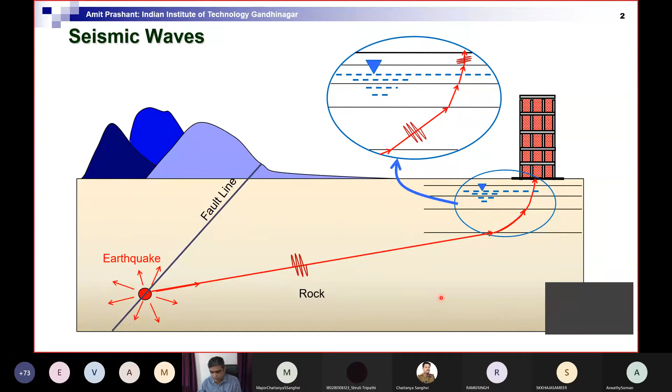We'll focus on design aspects mainly, but the overall picture will come only if you do all those components. That's what I wanted to point out. If I understand soils first, it is better for any design aspect. So what is the difficulty in designing foundations many times?

Besides the variability of strata and heterogeneity, which varies from point to point, it is difficult to know what soil is going to be where, unless you do very thorough geotechnical investigation. But of course, that comes with a limitation.

Then we have some small tests that we do, like index properties and other things in the investigation, and we get to know some parameters including strength parameters, the C value or phi value, based on which test you performed and which soil you encountered. That kind of decides which test you will be performing as well.

Most of the time within that we do very basic tests like UU test, UC test - unconfined compression test - or direct shear test. Very rarely will you see somebody doing consolidated undrained or consolidated drained test, unless it is a big structure or very big project.

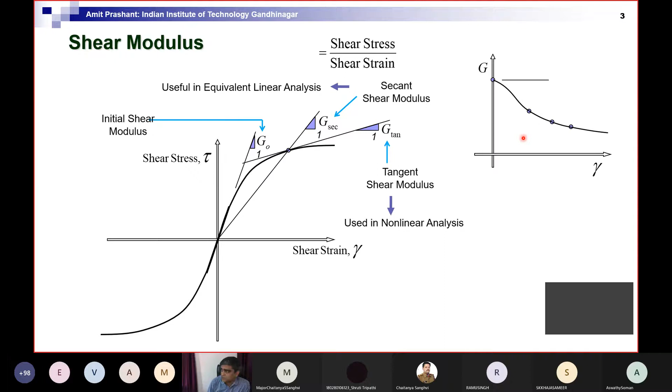Unless I perform some kind of resonant column test, or cyclic simple shear test, or cyclic triaxial test, or something like those. And that is going to be very rare that you will see this kind of testing being done. Now that is where the challenge is. So the challenge is not really in the concepts, the challenge is in estimation of parameters, and that too representing the whole soil strata, at least for the representative depth, you can say, right? So that is one thing.

Now, most of the times when we talk about dynamic analysis, or earthquake response or dynamic response, in whatever sense, we talk about anything which has cyclic loading. Now, what does that cyclic loading relate to the curve that we saw on the last slide? So if I perform cyclic loading at different strain levels, what I see is that the slope is changing - slope means joining the peak to peak values, right? So if you see this red to blue to dark blue, the slope is decreasing. But at the same time, the curve is becoming fatter - the cycle is becoming fatter.

And fatter means more energy is getting dissipated in completing the cycle. So that means more damping in a way. So with more and more strain, what I observe is that modulus is reducing, but damping is increasing - the material damping, right? Whereas G naught was same, the secant modulus is changing.

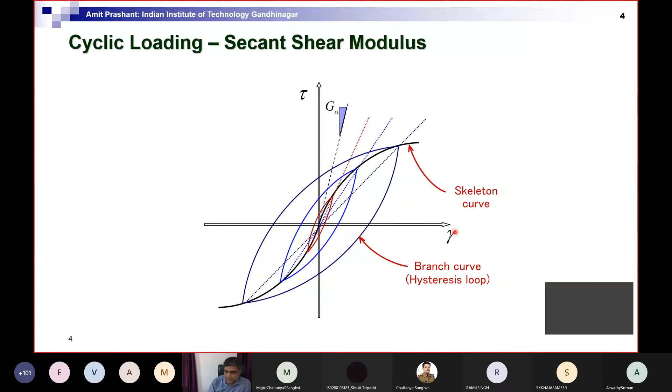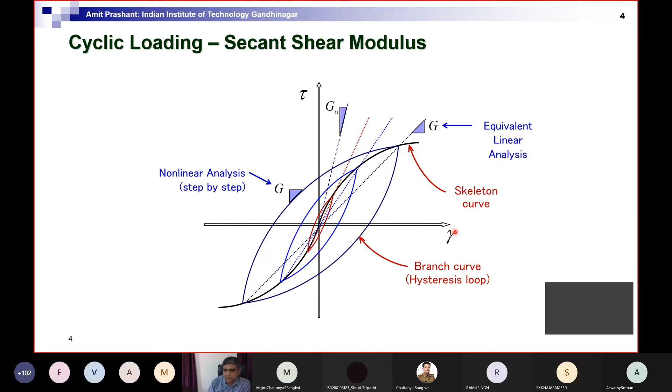If I compare with static response or backbone curve kind of thing, skeleton curve, right - that you see as a black curve here as well. So with this basic understanding that I have now, I can use the slope of the curve for nonlinear analysis, and the direct peak to peak value, slope value, that will be a secant modulus type thing, and that will be used for equivalent linear analysis kind of thing.

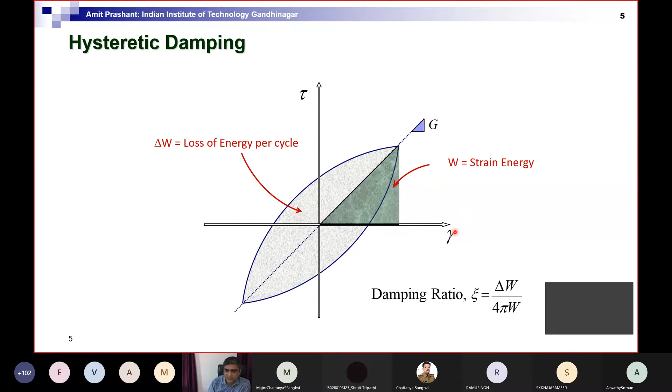And for damping ratio, I can find from this curve itself if I have it, but again, rarely will you see that any of these kind of tests are performed, right? So that is where we have to depend a lot on empiricism many times because we don't have data. It's very expensive and not many people can conduct these kind of tests. It's not that it cannot be done - it can be done, but it's just that it has not come to practice at a general level, you can say, because it's complicated to do those tests many times, right? And so some ballpark idea about what those values are can be obtained from some empirical or recommended tables.

Now this Gmax, there is another way I can find out - I don't need to necessarily perform laboratory tests. So the other method that is available to me is field tests. In the field, I can perform geophysical methods, which is like you may have heard of reflection survey, refraction survey, where we place geophones at certain intervals, and we take a hammer and put it on the ground, and that generates some mechanical waves. It travels through the ground, and then we measure at the geophones, and that I use for estimating how much time it took for the wave to travel.

And from that wave velocity, I can estimate the modulus. Of course, these waves are at very, very small strains, so this represents the G naught or G max value in a way. So that is one way, and there can be several methods like cross hole method, uphole method, downhole method, SASW, MASW.

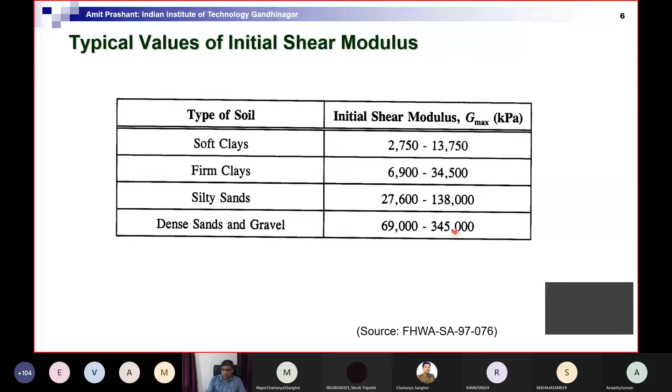So let's look at how these modulus values, G naught or G max, can change with different aspects. With overburden or effective stress, it increases. So with depth, it is supposed to increase even if you don't change the density, although density will change because of the overburden, but effective stress itself may have influence. Similarly, if void ratio is decreasing, G naught will be higher; void ratio higher means density is lower, so G naught will be lower. There are several other aspects that influence that G naught value.

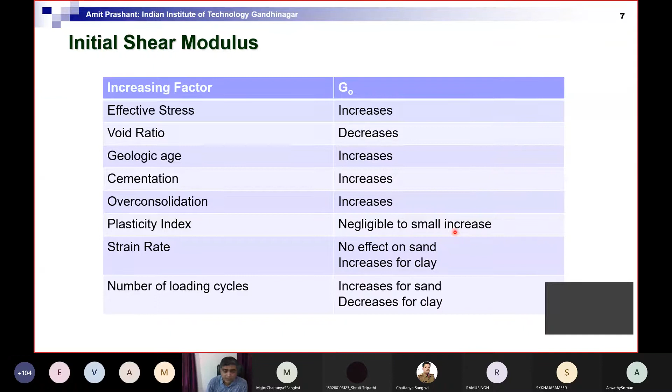So it's very difficult to say a table is good enough to represent that value in a way. That is one difficulty that we face.

Now another aspect to Gmax estimation: if I want a more precise estimate than a wide range of table values, I can correlate those with SPT or CPT values. SPT is standard penetration test, CPT is cone penetration test. And I can correlate that if I know void ratio, I may be more precise. If I know if it is over consolidated, I may be more precise. So the more information I know, maybe I will be more precise in my estimate. But there are more than 50, 60 recommendations of Gmax based on different combinations of SPT and CPT values.

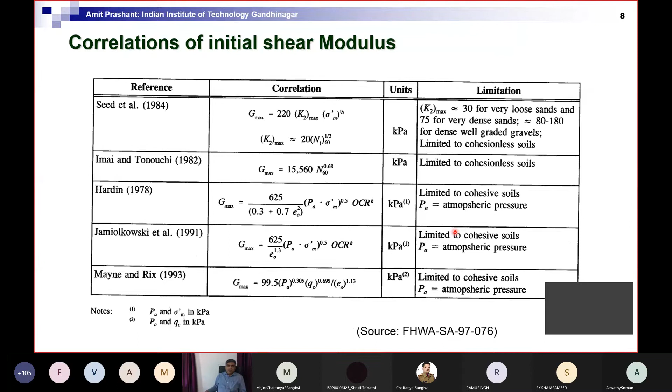Now if I take one geotechnical investigation for a site and perform this analysis, this is done for Ahmedabad only. This data is from Koba Circle, near DPS Gandhinagar. For that soil strata, we had plotted several recommendations about 10 years back, and looked at how it varies with depth based on these recommendations. What I see here is a variation of almost 7 times. It varies from almost 50 to 550, 60 to 550 or something like that at the bottom.

So how good is this? That is another challenge. All these correlations are good, but why is this varying so much? Because these correlations have been developed for limited data based on whatever different research groups found for certain sites. That representative site would be 2 or 3, 4 locations, that's it, and that soil may be very different.

For instance, you have more alluvial deposits in India, whereas if you take Japanese data, you will have more volcanic type deposits. And if you go to UK or US, you may have more glacial deposits or residual soils kind of things. They have very different nature in terms of their characteristics and how they respond to SPT versus how they have shear wave velocity.

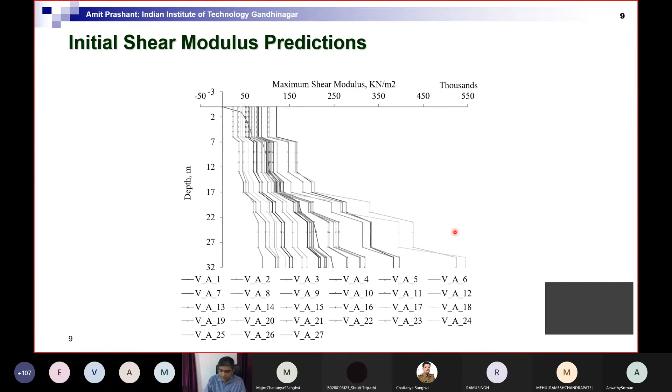Don't just depend on these empirical correlations, but perform geophysical methods. At least you may have 20-30% error, but not the 300-400% error possibility. There is a lot of hesitation and resistance to perform geophysical methods because people believe that won't give authentic results. That may have been true some time back, but today a knowledgeable person would know which method works for which strata, since not every method works for every strata. That's where misinterpretation happens, but in any case, it is better to perform these methods.

Now, if I know that, I still need a modulus reduction curve. So I need to perform for that particular soil some kind of resonant column test or dynamic simple shear test or something like that, and that is again very difficult. Well, at least I know G naught, so I will be able to find G if I can have some fair estimate of what kind of modulus reduction curve I can use.

So one representative modulus reduction curve range that I have produced here, for 3 different categories - gravel, sand, and clay - the variation can be maybe 1.5 to 2 times. I'm purposefully giving you these as large variations because people believe that like the strength of steel may have 5% or 10% variation, soil estimates may have 20-30% variation, but if you talk about these G values, G naught values, it can have much more variation. So that's where the challenge is in a way.

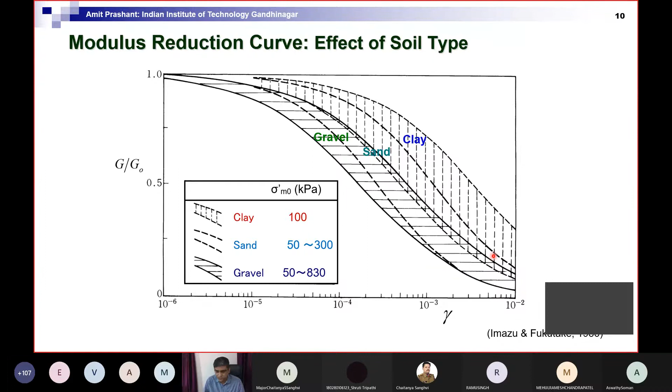Now, this kind of plot I may still use instead of going for a comprehensive geotechnical investigation, because that will become a project itself, and it's not worth spending so much time on that kind of investigation. I may take conservative decisions based on whatever I observe from the estimated G naught value or G value that I will use for analysis.

So I hope you got some glimpse of what soil properties mean in terms of modulus, in terms of damping, in terms of modulus reduction, and so on - some sense of that. For different types of loading, earthquake loading ranges from almost very small strain to very large strain, going almost like 1% strain or maybe even more. So depending on the soil strata, the deformations can vary a lot.

And that's where the G versus G naught relationship becomes very important for earthquake analysis. That is not so much the case for machine foundations, because we know deformations will be very small in a particular range. But here, we have no choice but to worry about the modulus reduction.

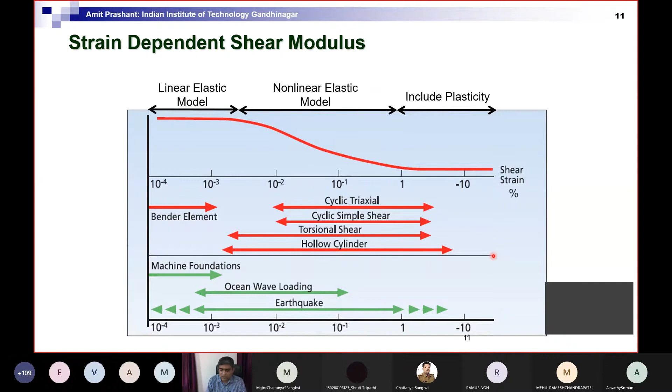Just to show how G versus damping variation happens - if you look at the strain level, the slope was reducing for the secant modulus, so G by G naught is reducing, that's the blue curve. And if you look at the cycle, it is becoming fatter and fatter, meaning more energy dissipation, more damping. So damping is increasing in general with gamma.

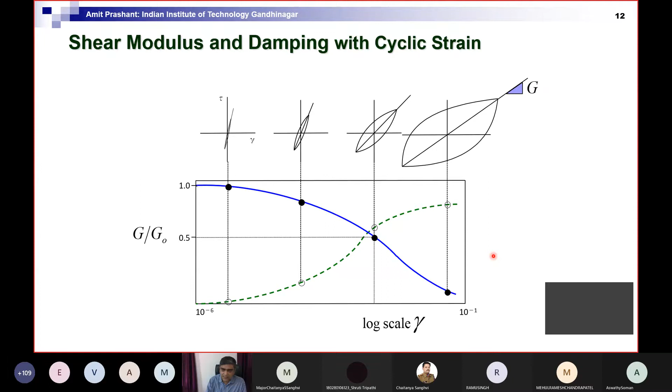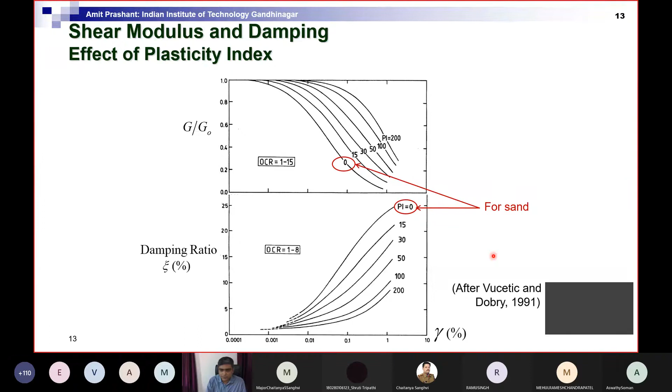This is true for most soils, but not 100% of soils. Some soils show a weird response due to other aspects coming into picture, like structural changes or pore pressure changes. These can influence the curves a little, but that is not a very common variation. In general, you will observe that modulus is reducing with strain level and damping is increasing with strain level. This is just one example for a soil, showing how damping ratio and G by G naught vary with strain level - if strain is higher, the damping ratio will be increasing.

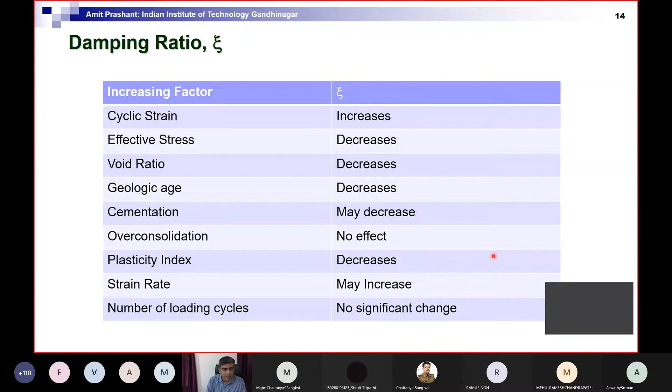If effective stress is higher, damping may decrease rather. With void ratio increasing, meaning density is lower, the damping is lower. Similarly, there are many other aspects which can influence damping ratio. Now, this is one aspect.

Another issue we deal with is volume change in soils. Soils can be contractive or dilative depending on their packing. If the soil is more dense type, it may be dilative. If it is loose to medium dense, it may be contractive. And if you have water present, that contractive response will lead to positive pore pressure, and that means reduction in effective stress.

And what we said is, if effective stress is low, G reduces. So we had one problem, and now on top of that, another problem: we have earthquake loading, which is fast loading. If water is present, that may increase pore pressure if it is loose to medium dense kind of soil, and that may reduce effective stress. If it reduces effective stress, then G will further reduce. So whatever you measured, whatever you estimated as G, that may not be sufficient. It may be much lower than that if you have pore pressure building up there.

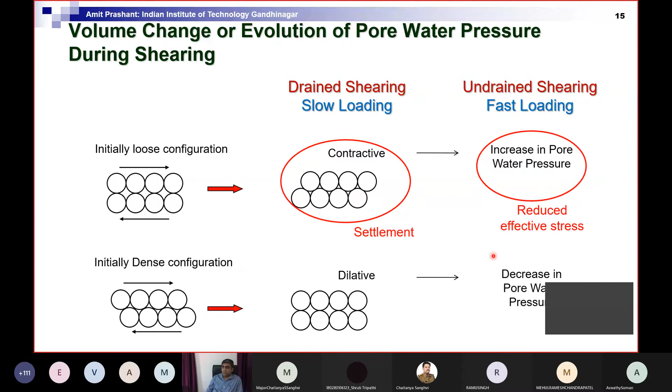In the dilative case, it is just the reverse response. Pore pressure reduces, the effective stress increases, so it becomes stiffer and stiffer with pore pressure building in the negative direction. So that way, that's not a big concern, I would say. But this contractive nature, in extreme cases, becomes liquefaction that you may have heard of, with very high pore pressure buildup.

Now, all these things are going to influence whatever structure you place on the ground, whether you like it or not, it doesn't care. So if you have dry soil, if you have drained loading, or if loading is very slow, pore pressure is not a concern, but you may still have vibrations on the foundations you place, and that may excite different modes of vibration possible under seismic loading. They may have continued settlement in each cycle, but that settlement will be reducing, and this settlement will be more than the static settlement you would expect under static loading. Static loading is just one cycle, in a way—not even one cycle, even half cycle, I would say.

Now, when you have undrained condition, if it is compressive or contractive in nature, you will have pore pressure buildup, and that pore pressure buildup may decrease the effective confinement. If the total confinement equals pore pressure, it will reach zero confinement in effective sense. So effective confinement becomes zero, and if that happens, the strength, the stiffness, everything goes to zero. So most non-cohesive type soils have this problem: if pore pressure is high, effective stress becomes very low, and they may lose strength completely—we call it liquefaction.

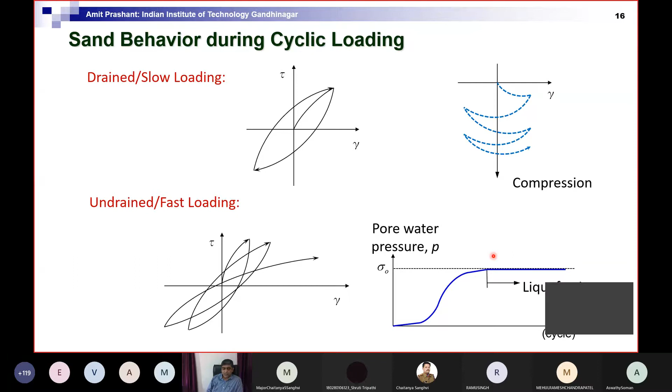There are certain soils which are highly susceptible, and there are certain soils with even lower density that may not liquefy under the same conditions. That depends on particle shape, size, the nature of interlocking and so on - there are several aspects to it. Then one important thing to remember is you need water for liquefaction to happen, for initial liquefaction to happen. So if there is no water, there is no pore pressure. That we have to keep in mind as well. So there are certain aspects to this which we need to worry about.

But is that the only story? No. So I was mentioning there is another aspect to liquefaction. The word liquefaction that you use is actually initial liquefaction, and it is one kind of instability in the soil called pore solid fluid instability, or fluid instability simply. Now there are other possibilities of instabilities that can happen.

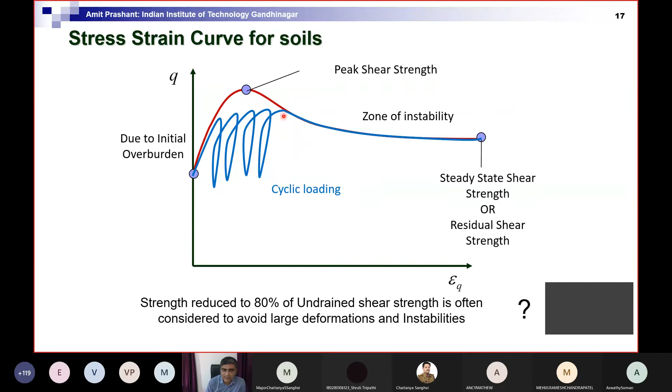Now this can be classified as instability again. This is another kind of issue that can happen many times - strength is not going to zero, but strength is much lower than what I had taken for design. So if the strength taken for design is higher than the actual strength of the soil, then what will happen?

You will have failure, right? And that's where in codes you will see that we use reduced strength many times - sometimes called residual strength also. That covers instabilities of this kind, you can say. So even from isotropic condition, under undrained condition, you will have this kind of response, and liquefaction is defined when it reaches here. But what I said is failure can happen way before that - it doesn't need to necessarily reach the liquefaction condition.

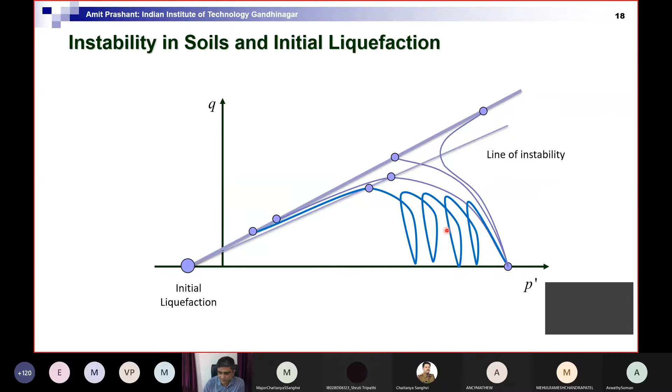Okay, so moving on to some structures. If I look at shallow foundations, they can have various modes of failure possibility. They can shake around vertically or horizontally, ratcheting can happen, they can shake about an axis in some sense. Also the regular failures you had earlier - excessive settlement or bearing capacity failures - those are also possible because of huge loads coming in.

All these possibilities exist because there is a wave traveling from the ground, interacting with the foundation, and the foundation supports a structure above that will have its own response. When we talk about dynamic response, it is always the frequency of loading and the natural frequency of the structure that have a role to play. If they match, you have much more amplification; if they don't match, you may not have so much amplification. So that aspect is also there on top of this.

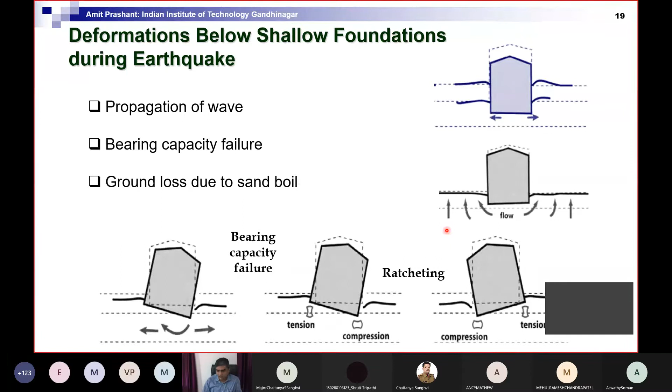So in a way, what you want to make sure is that whatever happens, your foundation is still there. And from that point of view, some guidelines have come up with time.

So due to cyclic degradation - the strength degradation I was talking about, stiffness reducing with strain - also another degradation is possible, referred to here, where with every cycle there is a reduction in stiffness. So the bearing capacity that was available for load is not available anymore. Both strength and stiffness have reduced with every cycle of loading.

There can be stability issues of the foundation - sliding or overturning - because of large horizontal inertial forces. And around the foundation, you may have large settlement due to tilting of the foundation, or due to moments coming from the building as well, so there is eccentric loading that will develop below the foundation.

Softening or failure of the ground due to redistribution of pore pressure is also possible. Remember that pore pressure develops according to the shear deformation that happens at different locations. So if shear deformation is uniform throughout, pore pressure buildup will be uniform; if it is not uniform, then it will be different at different locations. That is another complication that comes into picture in many ways.

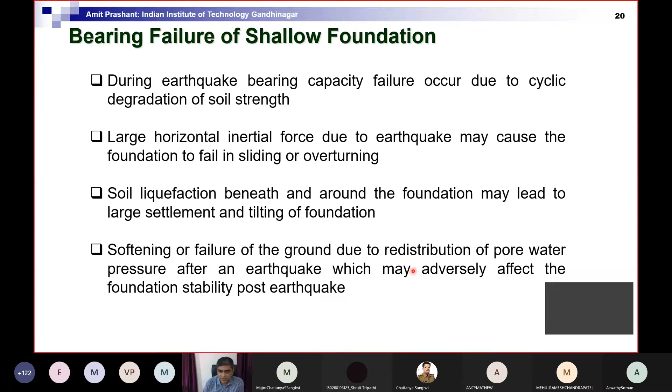Of course, we cannot handle all of this to 100% accuracy in simple analysis. It would become a very complicated transient finite element analysis with time domain analysis for seismic loading - that would become like a research project, and no project has that kind of time to perform the analysis. That's where codal provisions have to take care of it in some way.

For IS 1893:2016, we had one update from, I think, 2002 and 2010, and there were several updates before that. Even after 2016, there was a lot of complication and confusion within it. So last year we had a big exercise of revising 1893. Professor Sudhir Jain was involved as a World Bank initiative, taking lead, and we all chipped in for contribution into the revision of the code. It is under consideration for BIS to adopt it or not, but most of the recommendations I'm showing here are well established, so nothing to worry about as such.

So what I'm presenting here may not be the fully approved code. It may be approved after some time, and I'm not sure if there'll be significant variation from this, but there can be - so that is the disclaimer I want to give.

So what we define here are three types of soils, so that we can have at least some idea about what analysis we are going to do: Type A, Type B, Type C, classified based on SPT values, CPT values, or shear wave velocity, whichever is available to you.

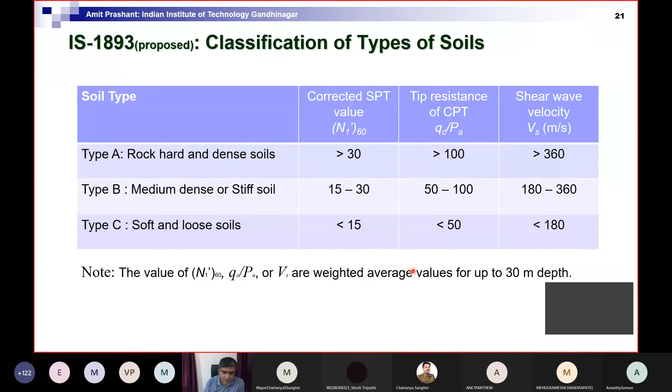And that we take as an average for top 30 meters of strata from the ground surface up to 30 meter depth. That average, weighted average value, we consider, and accordingly we classify as type A, type B, type C. Based on the types of soils, you decide many other things in the code, including which response spectrum to use for the building itself. You may have seen a similar kind of slide earlier in some other presentation as well.

From the foundation's point of view, let's make it very simple. Earthquakes are short-term, transient loading. We design structures for the maximum earthquake expected for a certain design period, some return period. So the probability of that earthquake occurring during the design life is very small, and the duration is very small. Third, if it happens, maybe we can allow some deformation to occur. Some damage, if it happens, is okay. It should not be life-threatening.

So considering all these aspects, I can allow the structure a lower factor of safety, or since it is for a short period, I can have a larger allowable bearing pressure. Remember, if it is transient loading, acceleration is happening for a fraction of a second, maybe 0.1 or 0.2 seconds. When I convert acceleration to displacement, it gets integrated, and that displacement comes out as some finite value, but that force occurs only for a short period. So what we are designing here most of the time is for force, not for deformation. If we allow that deformation to happen, then the allowable force can be increased. That is the logic behind this increase in bearing pressure assumed for seismic loading considerations. So IS 1893 allows for this increase depending on the soil type.

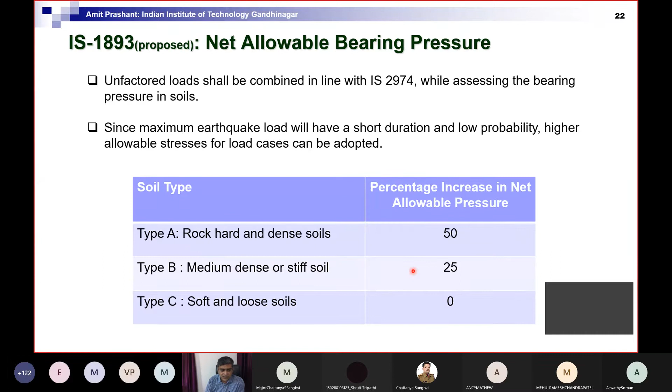Now, liquefaction susceptibility is another aspect, and here we are talking about initial liquefaction mainly. There is an appendix in the code that gives a simplified method of determining whether it is going to liquefy or not. What we are defining here are a few guidelines on what you should worry about and how to decide whether to perform the liquefaction analysis.

So if the soil deposit consists of loose to medium type cohesionless soils, sandy and silty sand, low silt type sands, then I should worry about it if it is going to be underwater. If it is not going to be underwater during the design life, I'm not supposed to worry about it.

Now, the code will also mention that if you have marine clays, you have to worry about it again. Marine clays are sensitive, so if you shake them, they lose strength suddenly, similar to what happens in liquefaction in general. So if you go to locations near Kandla port, sorry, Adani port, or south of Dholera and those regions, you may find some of these kinds of deposits. When rain happens, they become very soft, and similarly, if they are saturated and shaking happens, they may further lose strength and simply become like a swamp. So what kind of strength can I expect there? Almost nothing. So those are also included in the new proposal.

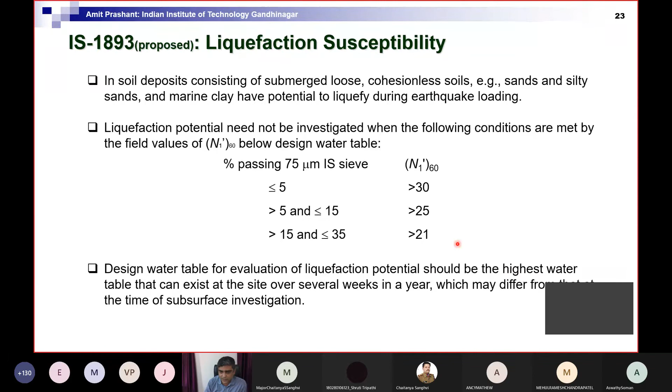Other than that, I can have mitigation techniques - some kind of ground improvement by compaction, dynamic compaction, or vibro compaction; all those possibilities are there. What we need to make sure is that the SPT critical values shown earlier are exceeded, so it's confirmed the soil will not liquefy anymore. Or alternatively, I can provide a water path for water to drain out quickly so pore pressure doesn't build up, done using sand columns, stone columns, or PVDs. That way water comes out as quickly as possible with no pore pressure generation to cause liquefaction. So one way or the other, I have to provide remediation.

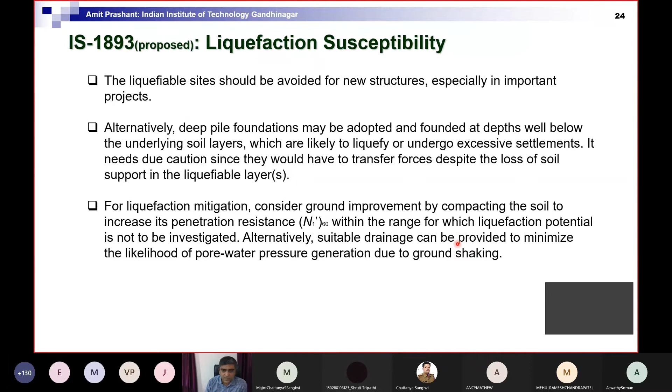Marine clays, layers, and other sensitive clays may also liquefy and undergo excessive settlements. That comes as a surprise many times because shear strength failures are mostly very sudden failures. Just before failure, everything will look fine, and then suddenly it will collapse.

Ground improvement techniques can be compaction or vertical drains, as I was mentioning. Feasibility of compaction will depend on soil type, so different soil types may need different compaction methods to be implemented.

If you provide vertical drains like stone columns or PVDs, you would expect that when seismic loading happens, there will be pore pressure buildup, and that pore pressure will dissipate. Water will go out from the vertical drains, so something is coming out of the ground. In that case, there will be some settlement, and that settlement we should account for in the overall design.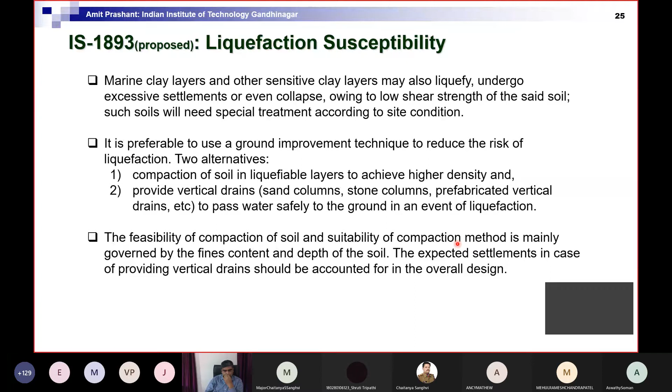Now, another aspect for shallow foundations. When you have seismic loading with a building at the top, you have inertia forces developing in the building, and those inertia forces are going to transfer at the base as shear forces or moments.

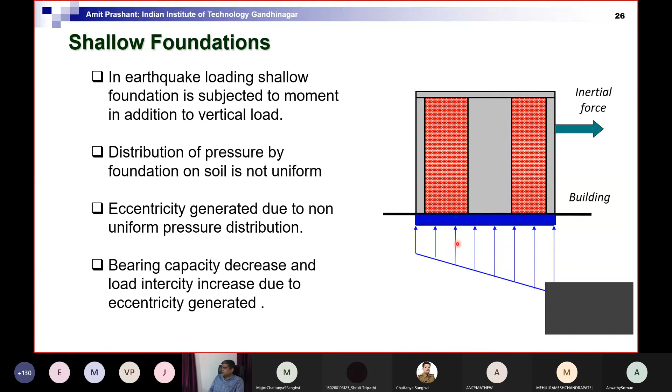One thing we generally make sure of is that the eccentricity stays within the middle one third, which we learned in undergrad itself — that in any gravity type structure or foundation, you try to remain within the middle one third. And we can estimate the bearing capacity, etc., for an effective width.

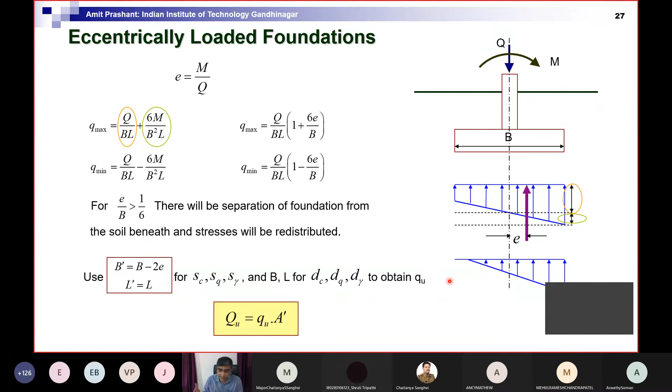For that case, different codes generally allow a certain amount of uplift. The width of uplift versus the total width — that ratio can go up to one third, or sometimes even one half, depending on which code you are referring to. That is for dynamic analysis, not for pseudo-static analysis or static loading.

Okay, now that is for bearing capacity. If I want to find settlement, maybe I can use similarly effective area, and that means load is same, but foundation size that I will be considering will be smaller, so the intensity will be larger. So settlement that comes out after calculation will be larger, right? That is for settlement calculation as an average.

But if I want to find differential settlements, or find out how is the distribution in larger foundations and so on, then I may need some kind of soil structure analysis kind of thing, and that is where some springs are provided many times. In most projects, we don't do this kind of analysis, except in large projects maybe, where you need to find out how much is the settlement, how much is the tilt, and so on. That's where, in a way, you want to find out how the dynamic response is going to be, if you are performing dynamic analysis.

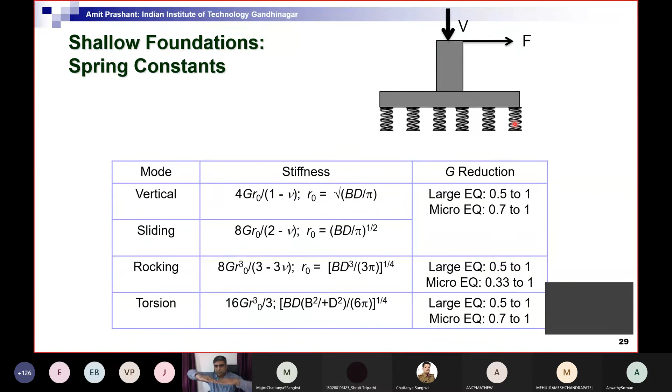So under those conditions, you can estimate G values for finding the stiffnesses. You can find the stiffness based on the G values of the soil, and springs are defined based on what mode of vibration you are looking at. So there are various possibilities for the foundation, and those various modes will have different stiffnesses. For example, vertical vibration will have a vertical spring, right? If you have sliding resistance, then your spring will come horizontally, not vertically, against sliding. For rocking, you may have the same thing, but the motion is different, and so on.

Now, for liquefiable layers, what care do I need if I'm providing pile foundations?

Now, there are two aspects to when liquefaction happens. One is I have loss of strength. Second is that besides that loss of strength, the whole ground is moving slowly after the earthquake because of liquefaction.

Due to some sloping ground, or maybe internal layers are in slopes, it may appear at the top that it is all flat ground, but the second layer is actually sloping. That can happen near rivers, near water bodies. Any formation will have slope, only then water was confined to that area. So after that, if you filled up the river or pond, you still have that slope below, buried into the ground. So that slope of the original ground is still sloping in a way, and if it is saturated, you have trouble in a way. So those kind of situations can cause movement of the ground in lateral direction, and that is called lateral spreading of the ground.

So the codal provision is that a site with an average sloping ground, which is steeper than 5 degrees, a 5 degree slope, there we have to worry about this lateral spreading in general. This is just additional information, but I will talk about this lateral spreading more on the next slide.

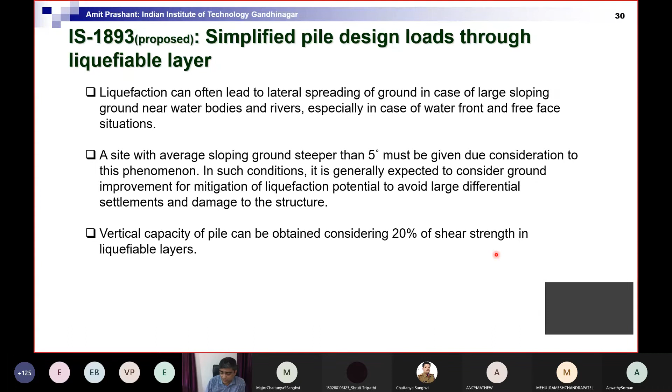Okay, so this is coming actually from Japanese codes, and now we are adopting it in the IS 1893 proposed one. It was not there in the earlier one. So this hopefully will get through.

The liquefiable layer has smaller strength, so maybe I don't need to worry about it too much, although there will be some pressure coming from there. But imagine how much force this can apply, and that will be in passive mode.

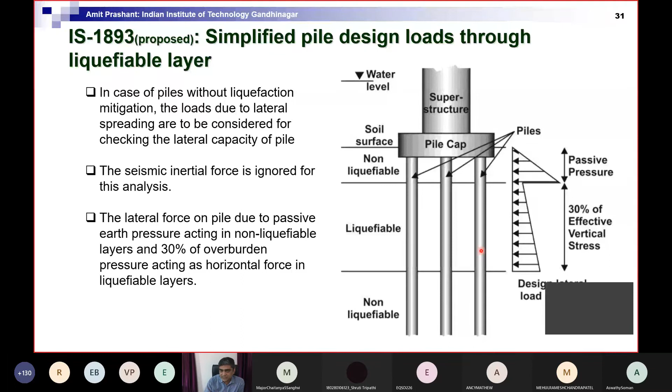So we have to look at both many times. Sometimes ground improvement may not be possible, or you may not have time for that, meaning there is urgency of implementation. In such situations, you may have to go for pile. Sometimes time is more important than money in a way, so in that case I'll go for pile for sure. I have to assess between all these aspects and then decide which way to go.

There are some general guidelines given, and we need to tie the foundations if we are providing isolated footings. Also in zone 4 and zone 5, which are high seismic zones, individual spread footings or pile caps should be interconnected with ties.

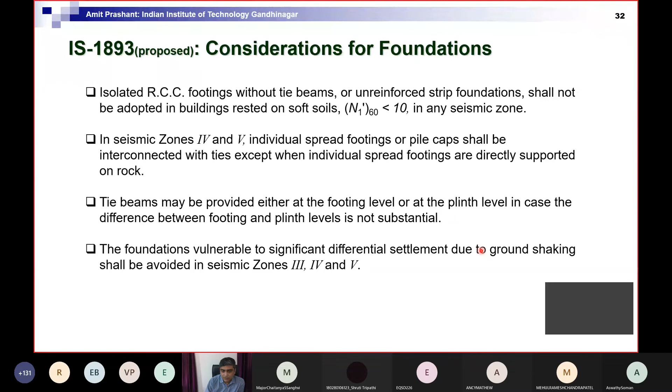A tie beam can be provided either at the footing level or at plinth level. And if the foundation is vulnerable to significant differential settlement due to ground shaking, we should avoid them in zone 3, 4, or 5 and make the foundation design more uniform settlement type.

Just to give you a sense of simplified analysis for this purpose, we can take beam column elements for the pile and then provide horizontal and vertical springs. Those springs can have stiffnesses corresponding to guidelines given in pile codes with respect to subgrade modulus, or we can refer to other codes if referring to that, and loading will be provided accordingly.

Up to whatever depth you are providing, along with this spring you will have some loading acting. And of course, in liquefiable layers, the horizontal springs may simply be removed because there is no lateral resistance almost. Even at the top, there may not be resistance available because the top may be moving with the liquefiable layers. So the springs will be available only for the ground below the maximum depth of liquefaction.

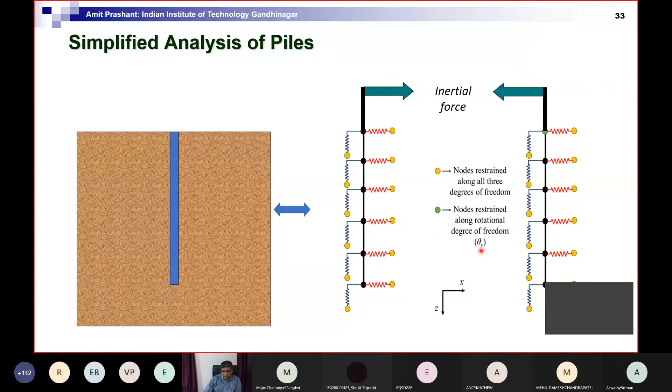These are two plots shown just to show the difference between pile without pile cap and with pile cap. The boundary conditions are a little different.

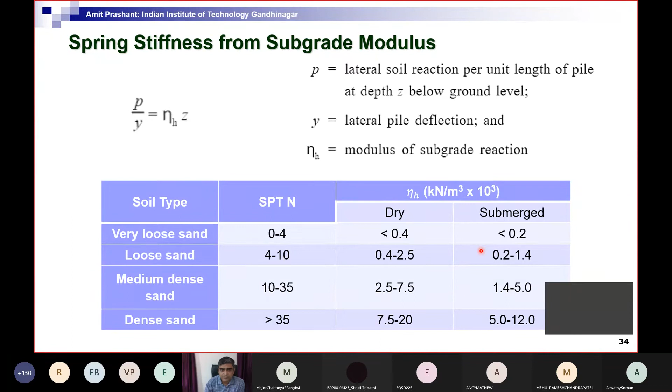So the codal provisions I was referring to for subgrade modulus, I have copy pasted here, that is IS 2911 part 1 or part 4. I think I forgot to mention the pile code here, but that is for a concrete pile. There is an IS code that gives you this, and similarly for clay soils, it is a different criteria.

For a group of piles, we have another challenge where multiple piles are placed nearby and deformation can happen in one direction or the other. So for critical cases, we may consider either along the X direction or Y direction of the building, most of the time. Then I have to provide spring constants also in both directions, following the same guidelines we saw earlier.

But there is a P multiplier, which is a stiffness reduction that has to be provided because the pile in front may have resistance different from the pile inside. So piles outside may have different resistance than piles inside, having some kind of shadow effects and so on. That effect has to be accounted for when you have nearby piles, and there are some recommendations for that.

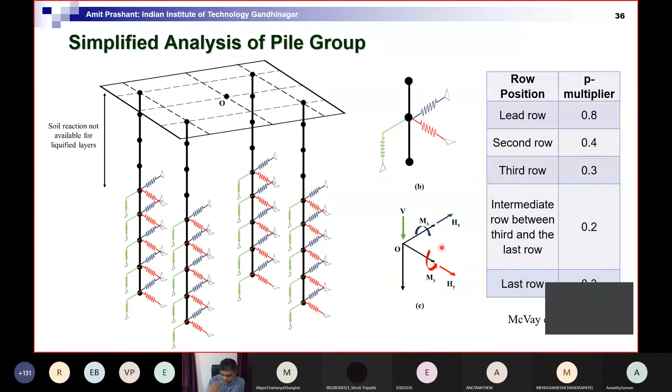So we are working on a code for Indian Roads Congress right now, where we will describe all these aspects further, and hopefully it will come out in the next 4 or 5 months, 6 months kind of thing. So these P multipliers are used to have the spring reduced.

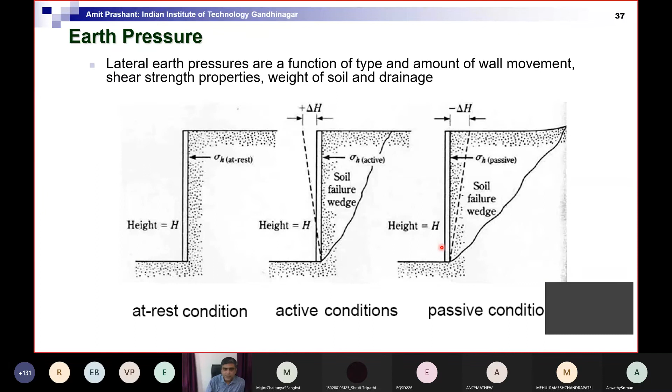So, last leg of the discussion, I hope I'm on time. Very good. So earth pressure, you all know, active earth pressure, passive earth pressure, can be talked about briefly. For estimation of earth pressure on a gravity wall or cantilever wall, we classically were using the Mononobe-Okabe method, and there are several variations of that people have suggested over time.

But still in the codal provisions, mostly it is the Mononobe-Okabe method that is used. So here what you see is besides the vertical weight of the wedge, we have a horizontal inertial component and vertical inertial component, which we provide as a pseudo-static force.

So it is static force equivalent, you can say, for the seismic shaking. Now, how much would that be? That is another question. But if I know these values, then is it stable or not? So the analysis is quite similar to what you do for Coulomb's method. It is similar, actually, no different. It is just that now instead of W, it is 1 minus kV times W plus vector sum of KHW. So the inclined resultant may come like this.

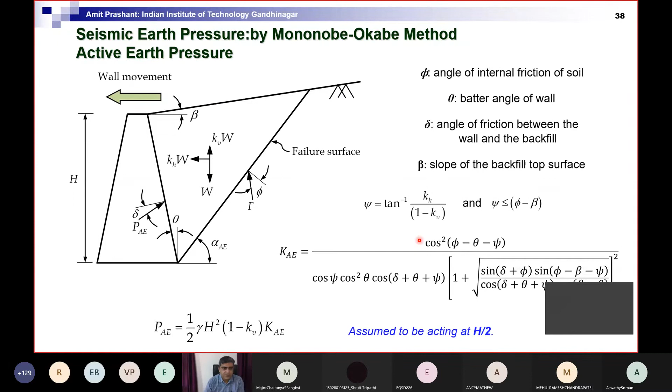And with that excitation force, I have to estimate what would be the earth pressure force here. And that will be my active earth pressure with earthquake loading. So the analysis is quite similar, there is no difference as such. Similarly, for passive, I can find out. So loading is extra, this part, but other than that, everything we do in general Coulomb's method of earth pressure theory, it is the same thing as what you do in this also.

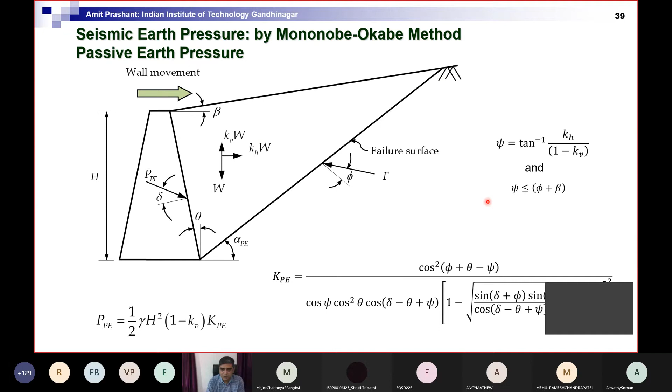Now, before we go further, I want to reflect a little bit on slopes. I mean, my focus is on retaining wall, but I would like to talk about slopes, which are kind of solving the similar problem in a different way. Just to have a sense of what kind of earthquake motions and how they impact the stability, etc. And then we will relate it back to the retaining walls.

So if I look at the slope, there is also a wedge here, like we had for the retaining wall, Coulomb's method. It's just that there is no wall here, that's all. So there is a wedge here, and that is where we apply some horizontal force, some vertical force due to earthquake, and there's a vertical weight of the wedge, you can say. And from the seismic shaking, I have this acceleration in horizontal direction and vertical direction.

If I assume this kH is equal to aH by g, or you can say kH in terms of aH value as g units, so kV will be the aV value in g units, you can say. So I can apply that directly, but I will be saying in that case that kH is representing the maximum acceleration in some sense. Okay, but that is not necessary, I will come back to that.

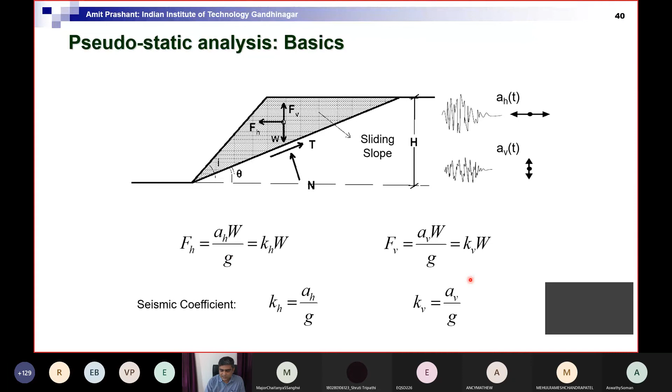Now, factor of safety, in this case, we consider close to 1 because we want to allow some deformation to occur. We can allow if there is, accidents. Why am I saying that? So if you take kH is equal to A max, maximum acceleration, peak acceleration, then if you go to factor of safety 1, even there will be no deformation almost.

This is because the peak acceleration is not exceeding the force that is needed to deform the slope. But if I take kH less than peak seismic acceleration, then corresponding to that, if I find factor of safety, there will be some deformation, and that deformation is acceptable to me. So that is what we are saying in a way. So there is some average acceleration that we use, assuming that there will be some deformation. And with that acceleration, we say factor of safety is in the range of 1 to 1.1. So I hope it is clear.

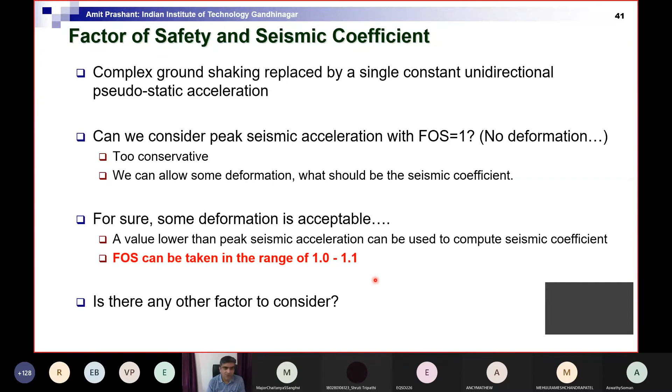It's very difficult to know whether it is clear to you or not. But if you have any questions later, please feel free to contact me. Different codes, different countries follow different values for kH.

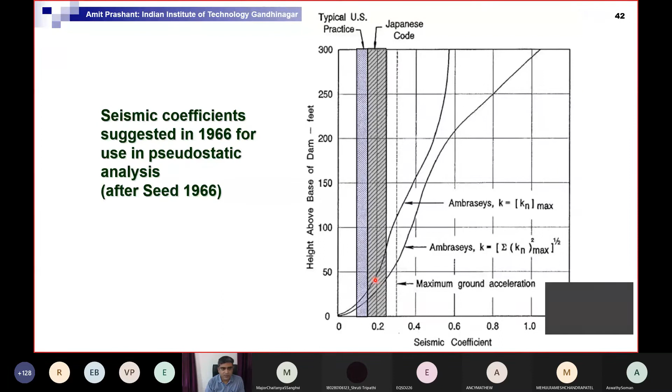It also depends on what is the frequency of those earthquakes and what level of earthquakes are more prone in that region, and what kind of structures you want to build. That also factors in. So these are some general guidelines that were classically used, recommendations from 1966, long time back. In India, I think even IS code 1893 is following these guidelines, which is based on the zone factor Z for different zones 2, 3, 4, 5. We have this Z value defined. Importance factor is for the structure type. Ground amplification factor depends on the soil type, and weight of the sliding mass is weight, of course. So FH by W will be the KH in some sense, right?

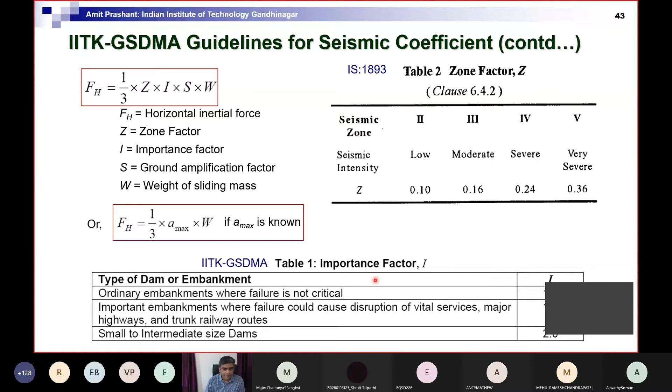So these guidelines are available in IS 1893 as well.

Okay, now if I allowed some deformation to occur, then I may be interested in finding out how much deformation is going to happen. And actually you can find it, approximately at least. For that, I need to first know what kind of earthquake I'm assuming is going to occur. So if you want to know how much deformation, you need to know what loading you are applying. So I cannot go with just zone factor anymore. I need to know the seismic excitation that I'm assuming will occur on my site. So I need to know time history of acceleration, ground motion. Then I need to know the yield strength of soil that is in the slope or embankment.

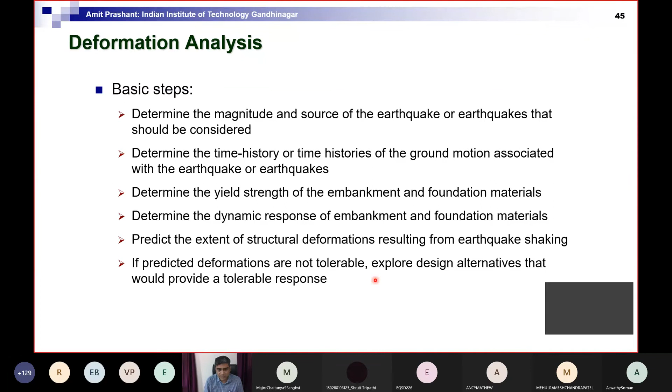And if I take a certain KH value... sorry, before that, if I perform dynamic analysis, then for that seismic loading, I can perform 2D or 3D analysis of the embankment, and I can know how much deformation will occur. But that deformation has to be within limits. But that is a complicated process. Can we have a simpler process that is going to give me approximately the same estimate as what I will get from dynamic analysis? So that is the target in a way.

If Fs exceeds the mu(n) value, the frictional resistance that is available, this block will start moving. If Fs does not exceed that, then it will not move. Simple. So if factor of safety is greater than 1, no movement. If factor of safety is equal to 1, it's the impending motion condition, just about to move. But if factor of safety is less than 1, then the force is exceeding the capacity, and there will be acceleration for that period. The moment that acceleration stops, the force reduces, and the block stops.

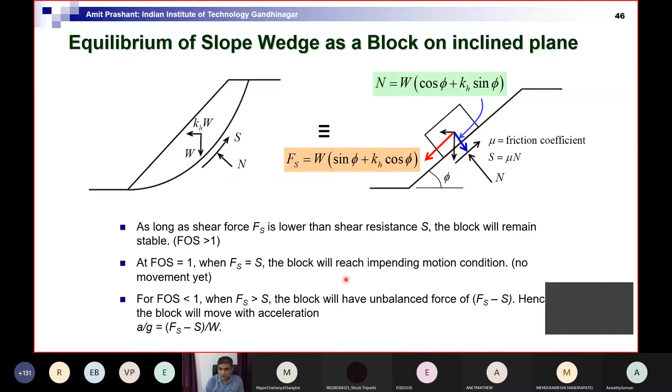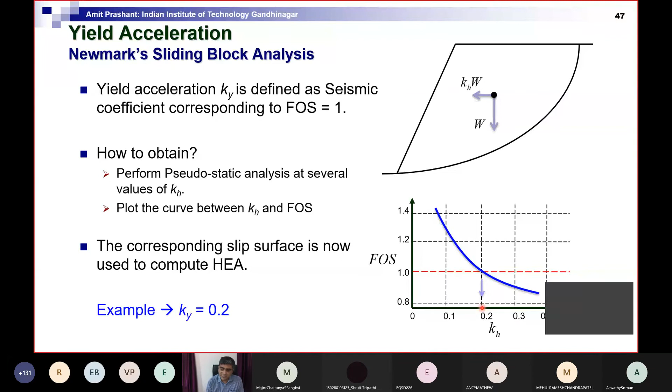So that is the concept that Newmark used for sliding block analysis. What they did is, for different KH values, they found out whether this factor of safety is 1 or 2 or 3 or 0.15 or whatever. So for different KH values for a given slip surface, they found the factor of safety. Very simple analysis. Then they said at factor of safety 1, what is the value of KH that is coming out? In this case, in the curve below, at KH equal to 0.2, factor of safety comes around 1. So that we call yield acceleration. The moment the KH value reaches KY, the factor of safety is 1. That means if KH is more than KY, there will be movement. If KH is less than KY, there will be no movement.

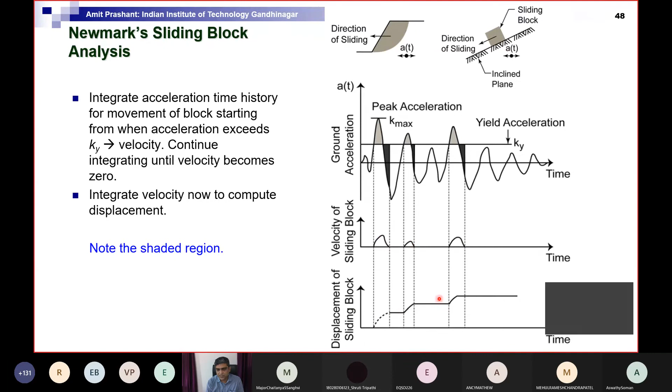So minus acceleration, you can say, so then there's velocity reducing. And similarly it will happen here, it will happen here. And if I integrate these areas, I will get displacement, how much displacement is happening.

So now I know how much displacement is happening in the block or in the slope that way. So same concept is used for slopes. For a given horizontal equivalent acceleration, I can find out velocity. With deceleration, velocity is reducing, but for positive velocity there will be positive deformation. So slope of deformation is still positive, then it will remain constant, then again increase will happen, and so on.

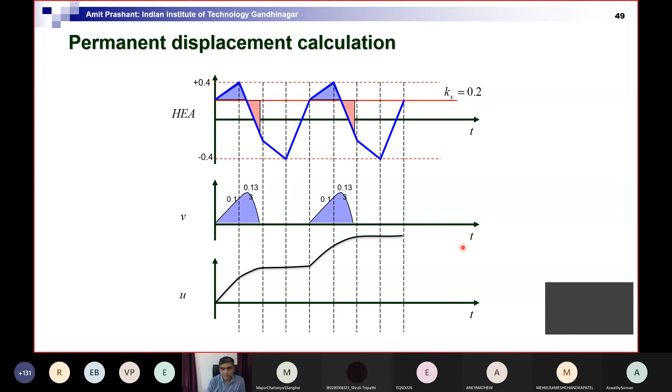Now for retaining walls, conventionally the codes use a similar approach. There are two ways we can look at that. The slope way, which is to say I will assume the bottom of the gravity wall or cantilever wall and a wedge going from the end as the rupture plane, and use that slope method for this purpose. Same analysis what we did for slope, I will do for this rupture plane, for this whole mass. I can perform the same analysis and I'll get how much deformation is going to occur. So after deformation there will be some deformations like this, movement, sliding, or whatever is happening. So according to that, I can estimate.

But we had some more experiments done about 20, 30 years back, and people found that this is not the best thing to do in a way. But it was difficult to say what else we can do, kind of thing. So that is one issue in a way.

By the way, another recommendation in the codes is available where they say that if I cut a vertical imaginary line here and calculate how much is the dynamic earth pressure here, and calculate the stability of this, with that static force I can estimate yield acceleration for this part only. Then maybe I'll be able to do that, but usually that is not the best way to do that. That will be good for stability analysis, not for deformation analysis.

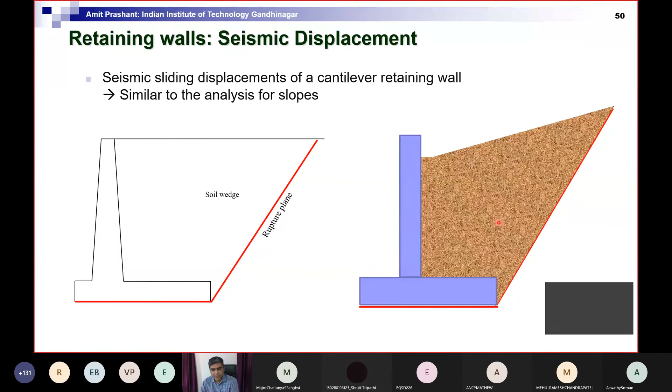So deformation analysis is better to be done like this. So that is one issue I mentioned earlier, that it is not giving the best results for retaining walls, what we want. And the reason was somewhere hidden. And that's where one of my PhD students was working and graduated last year.

And what they experimentally found is it is not one wedge that is happening, actually it's two wedges that are happening in retaining walls. So gravity wall doesn't have this issue, gravity wall is like this, so there is no issue. When you have cantilever walls, then you have this issue where there are actually two rupture planes. So when you have two rupture planes, there will be sliding happening at this outer rupture plane as well as inner rupture plane, and that will have different equilibrium equations.

And that's where we had proposed a double wedge model where sliding happens in this wedge and the soil near the wall becomes part of the wall. But for stability analysis through Coulomb type method, now you have to worry about variation of this red line as well as variation or rotation of this blue line. So it's double work, you can say, and there is force compatibility, acceleration or velocity compatibility issues as well. So solving all those aspects, we can find a solution to this. And what we found is this result matches very well with what we found from FEM, finite element methods in general.